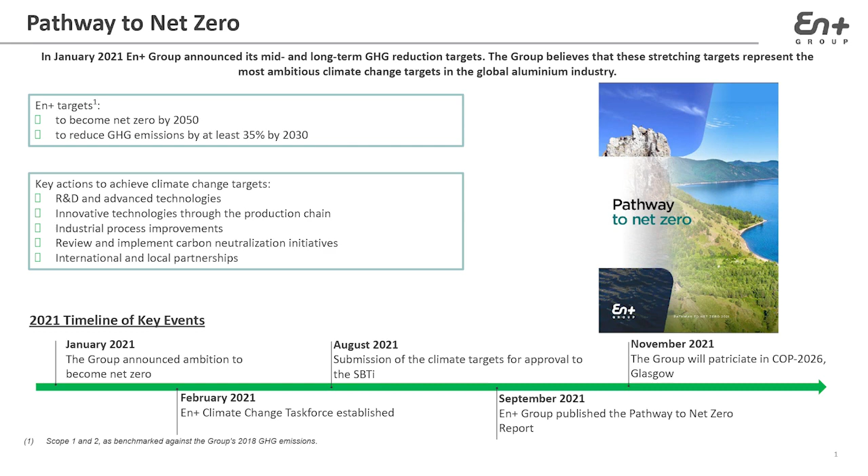Next was the success of our new generation of inert anode electrolyzers, allowing us to produce the lowest carbon aluminium ever created, tantalizingly close to net zero. We also said that in September 2021, we would publish a detailed plan for our pathway to net zero. Well, here it is. We have rigorously stress-tested these proposals, consulting with a wide range of global stakeholders, customers, and outside experts. But let's be honest, genuine decarbonisation isn't easy. It will be a real challenge, and implementation will only get harder. But that won't deter us.

Decarbonising power sources represents about 60% of the potential emissions savings in the aluminium industry. But we already have more than 98% of our aluminium made in smelters using clean, renewable hydropower. So we are not exactly replete with unpicked low-hanging fruit, and we've had to look hard at the entirety of our global production chain to get to a credible route to net zero.

Fortunately, a green business can also be an efficient business, and so we will squeeze out every efficiency to be made. But we also can't dodge the fact that transformation on the scale we are proposing will also require massive investment. Therefore, the group is embarking on an ambitious new cycle of investment with an unprecedented programme of capital expenditure. This will make us not just fit for the new sustainability standards of the 2020s, but ultra-competitive in a future world which can't afford to produce carbon at all.

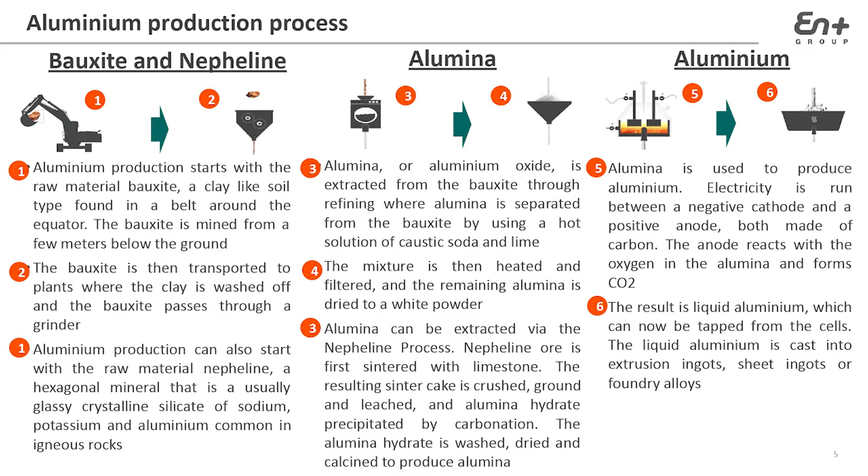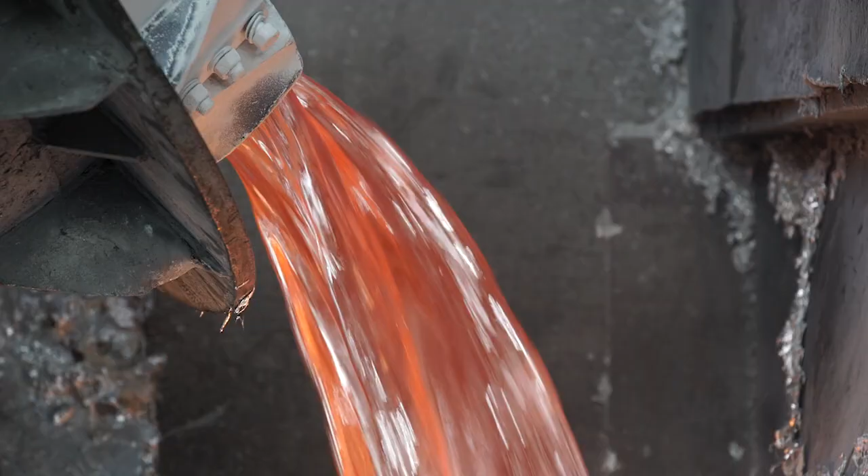Thus, by 2050, we will be a net zero producer in terms of greenhouse gas emissions. Our experts will walk you through various stages, but let me summarize. We're going to go through all production facilities under Scope 1 and Scope 2 in both metal and power segments. And we are going to concentrate on several measures.

First, which is our primary focus, is abatement. Second, there is avoidance of emissions. And third, there is compensation. Talking about abatement, from 2030, we'll start reducing our emissions at smelters by using so-called pre-baked anode technology. And aluminum refineries will be using natural gas and LNG where it's applicable.

From 2040, we'll be converting to inert anode technology. And aluminum refineries will be using either green hydrogen or electric power from renewable sources. Then, let's not forget that we'll be continuing to enjoy the benefits of low carbon hydropower. And this will be our avoidance program. We launched a new energy program, which is a very good example and a success story of this. Mikhail will talk more about this.

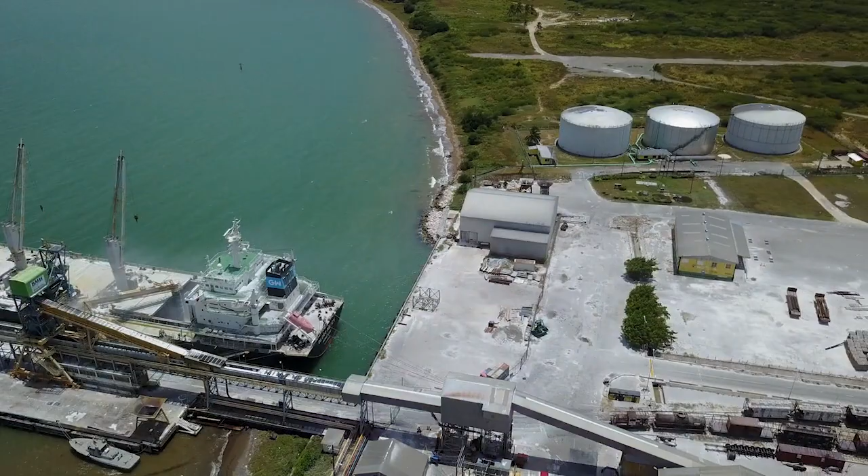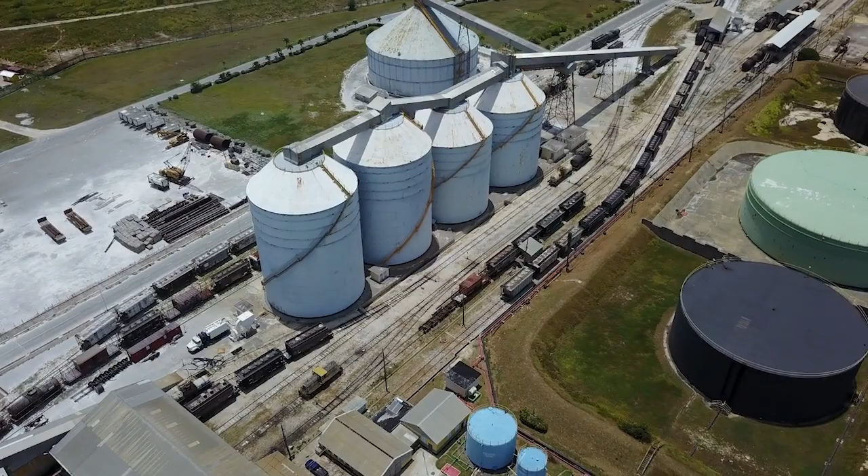We're looking at projects to both lower GHG footprint and reduce cost per ton for our operations. Windalco has also looked into measures to reduce the GHG footprint of its ancillary facilities. For example, lighting of the pier at Port Esquivel is now fully solar powered, and plans are currently in progress to have the entire port solar powered. At Ewarton, plans are in place to have areas of the plant solar powered where possible. In Jamaica, we look forward to contributing to the net zero ambitions.

Hello everyone, my name is Stefan Beaulieu and I'd like to welcome you to Rusal Aughinish Alumina Refinery based in the west of Ireland. It's a pleasure for us to give you an insight on our carbon journey so far, on what we've achieved and what we're planning to do to reduce carbon emissions towards zero. Protecting the environment and surrounding areas has been a priority since the refinery has been in operation. Some of the areas around the plant are European designated protected areas for various species and habitats.

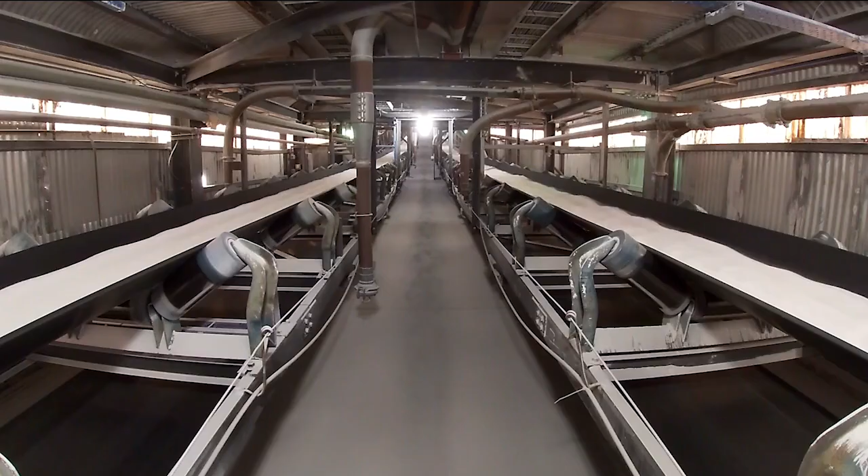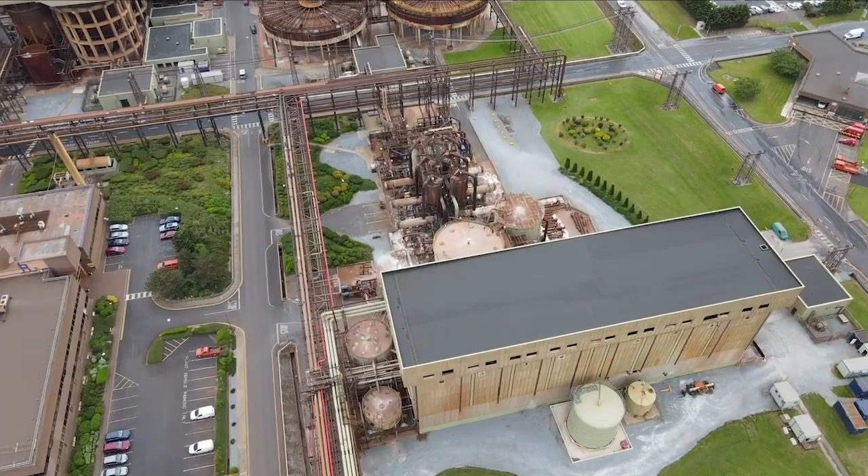The plant has been in operation since 1983 and today produces over 1.9 million tons per annum of alumina. The alumina is mostly shipped to Europe for the production of aluminium. Aughinish has a total of 650 workers on site, and the plant is one of the most energy efficient refineries in the world and currently the 4th lowest carbon emission producer per ton of alumina. This was achieved with a high level of commitment to continuously reduce the energy requirement to make alumina and a high level of investment to migrate from oil as energy source to 100% natural gas since 2014. Moving to renewable energy sources is the next phase of our journey.

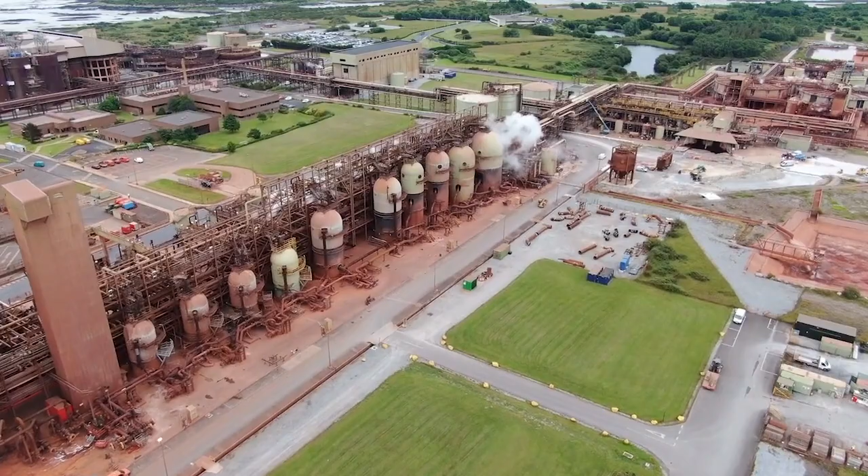Aughinish Alumina was designed in the 70s, and the only energy source available here in Ireland at the time was fuel oil. Temperatures of up to 250 degrees centigrade are required to dissolve the alumina contained in the bauxite via a process called Bayer digestion, and temperatures above 1000 degrees centigrade are required to calcine the product into alumina. These two processes are very energy intensive, and Aughinish has invested very significantly over the years to improve its energy performance and reduce its greenhouse gas emissions.

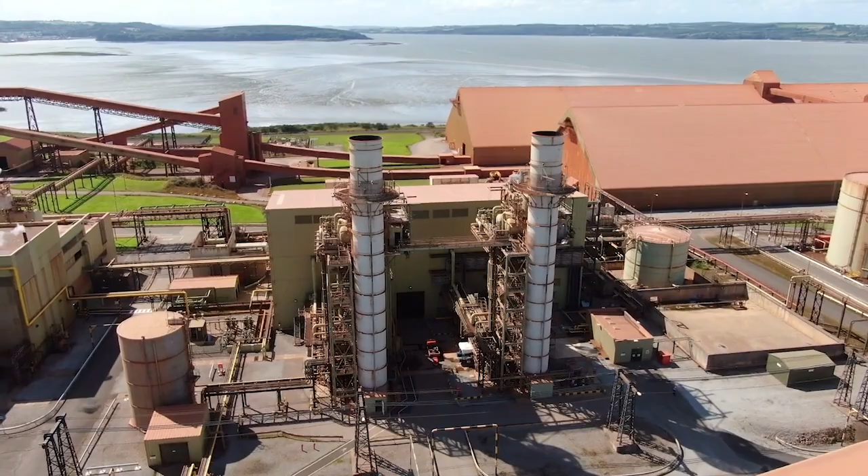The conversion from fuel oil to natural gas was delivered with a major multi-year investment program which was initiated in 2006. It started here with this big building behind me. A new 150 megawatt high efficiency combined heat and power plant, or as we call it, CHP. The CHP plant supplies 300 tons per hour of steam to the refinery and 40 megawatts of electricity is produced to supply the plant equipment, with the excess power exported to the national electricity supply network.

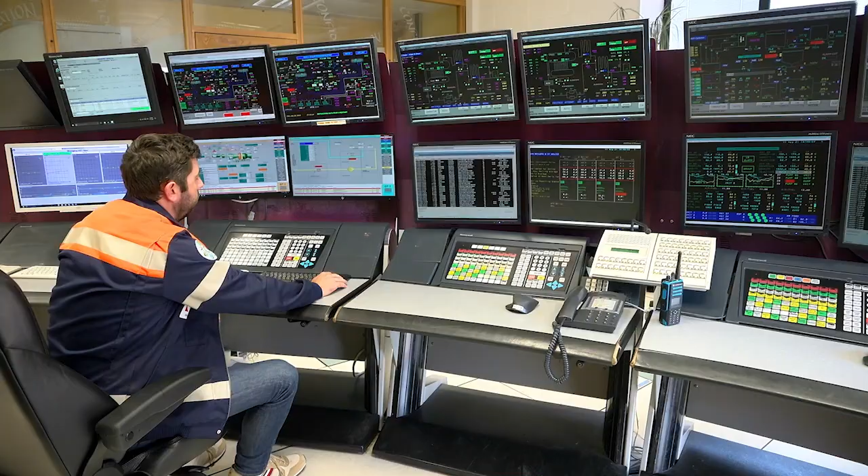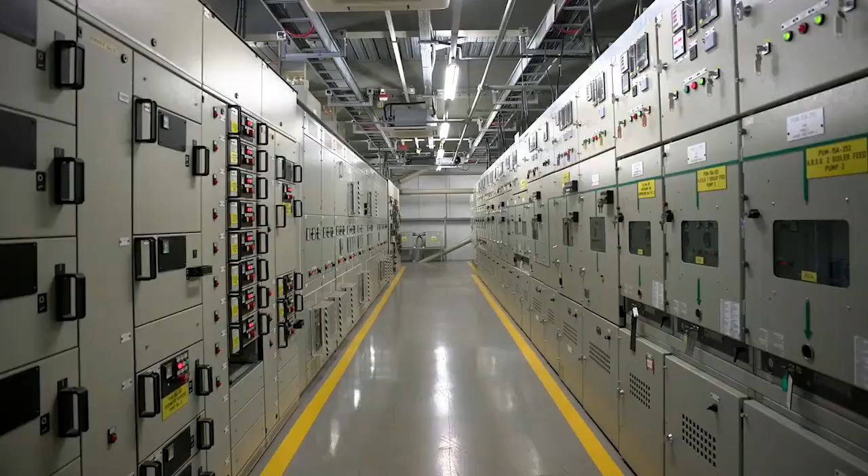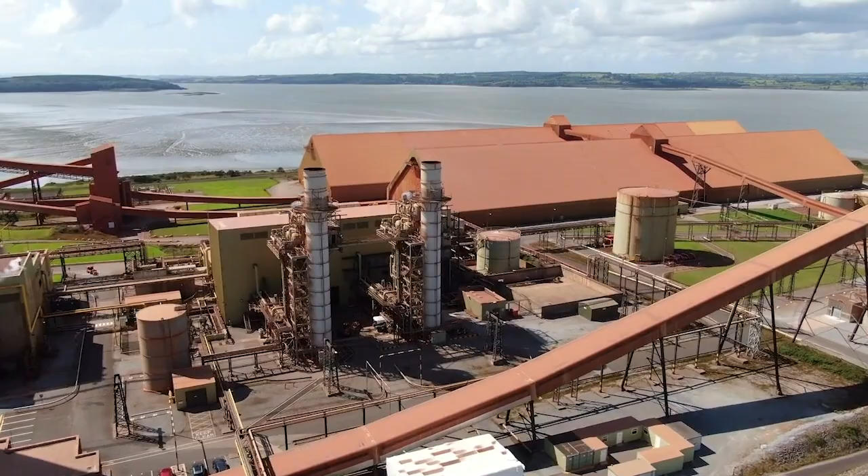The electricity produced by the CHP plant is much lower in carbon content compared to the national average. CHP is still the lowest carbon technology after wind to produce steam and power in Ireland. CHP will remain the best technology until a renewable fuel is commercially available and economically viable to industry in Ireland, which is probably more than a decade away.

On the calcination side, all 3 alumina calciners were fully converted to natural gas by 2012. And to complete the transition to natural gas, in 2014, 2 new gas boilers were constructed to replace the fuel oil boilers. In parallel to this fuel transition, many energy improvement initiatives were implemented in the refinery.

With these investments and continuous internal energy improvement, carbon emissions have reduced by 40% in the last 20 years. Sulfur oxide emissions have reduced by 100%, and nitrogen oxide emissions by 90%. The next phase of our journey will be exciting and challenging, as we need to make major carbon reduction using technologies that are currently not commercially available.

This will be done by improving process energy efficiencies such as recovering waste heat in all areas of the refinery and by moving towards using renewable energy sources. The wind is currently the most abundant renewable energy available, with over 300 wind farms in operation in the Republic of Ireland. Aughinish plans to start producing steam to supply the refinery using an electric boiler.

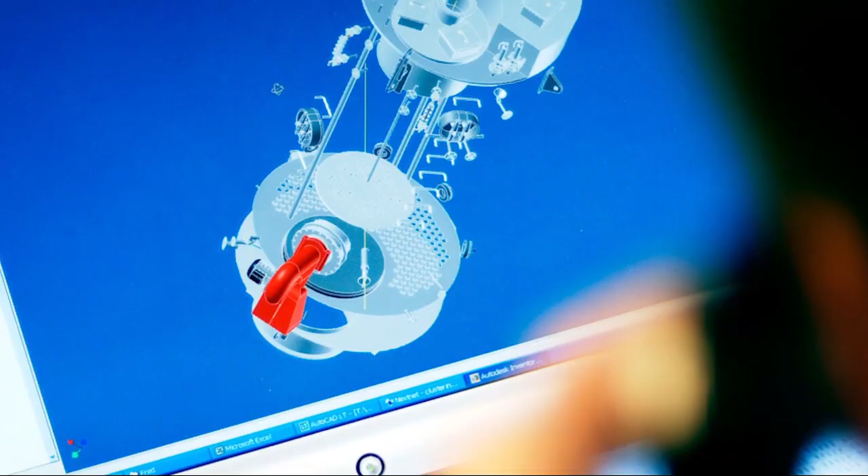We have been successful in a project grant application to install a 25 megawatt high pressure electric boiler. This boiler technology can ramp up and down very quickly depending on variation of wind power generation. The project will improve grid stability as well as providing steam to the refinery from renewable electricity in periods of wind generation.

Electrification of our processes will play a significant role in our decarbonization roadmap, and it is possible for us in Ireland that green hydrogen and biofuels may become economically viable in the coming decades or so. In summary, Aughinish is very well positioned to face the transition towards a zero carbon production of alumina.

An important part of our pathway plan is our continued commitment to our new energy program, which has been ongoing since 2007. The new energy program provides for large-scale reconstruction, replacement, and modernization of the main equipment at the company's Siberian hydropower plants: Krasnoyarsk, Irkutsk, Bratsk, and Ust-Ilimsk.

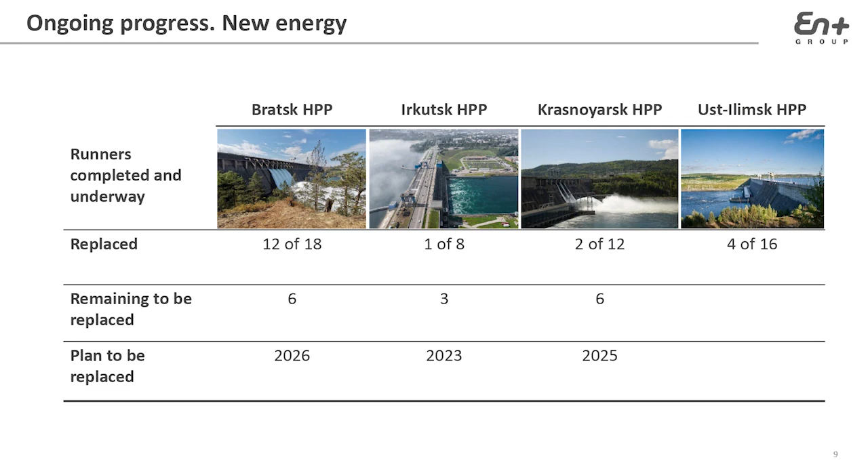Hydroelectric units are being retrofitted, and the turbine wheels, transformers, and outdoor switchgears are in the process of replacement. The modernized turbines also incorporate an up-to-date runner design that prevents risks of turbine oil leakage into water. As a result, we can ramp up the energy output from the same volume of water passing through the hydropower turbines.

Upgraded equipment at our HPPs has already supported an increase in hydropower production of 1.7 terawatt-hours in 2020 and helped to prevent greenhouse gas emissions by approximately 2 million tons due to the partial replacement of prior thermal power generation volumes. We are on track to generate 2.5 terawatt-hours more electricity by 2025.

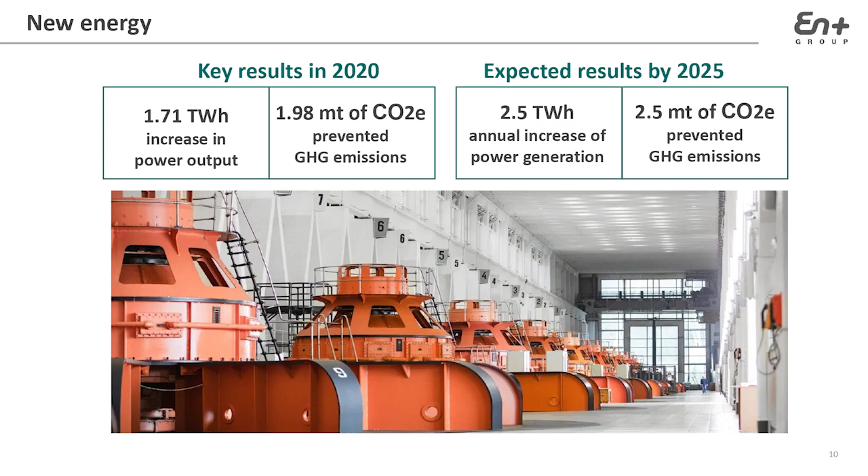The program will also allow us to prevent emissions of at least 2.5 million tons of CO2 from 2025 by replacing coal-fired power generation volumes with hydropower-generated electricity. Additional higher efficiency of up to 8% will result from the improved blade profile of new turbine wheels and the materials used. The modernized HPPs will become even safer and more reliable.

We will also work to decrease losses during transmission of electricity. That means reducing losses to less than 5% of electricity supplied to the high voltage and low voltage grids by 2024. To ensure further transparency of aluminum carbon footprint, we decided to measure anthropogenic GHG emissions from HPP reservoirs, in line with the IPCC guidelines for national greenhouse gas inventories.

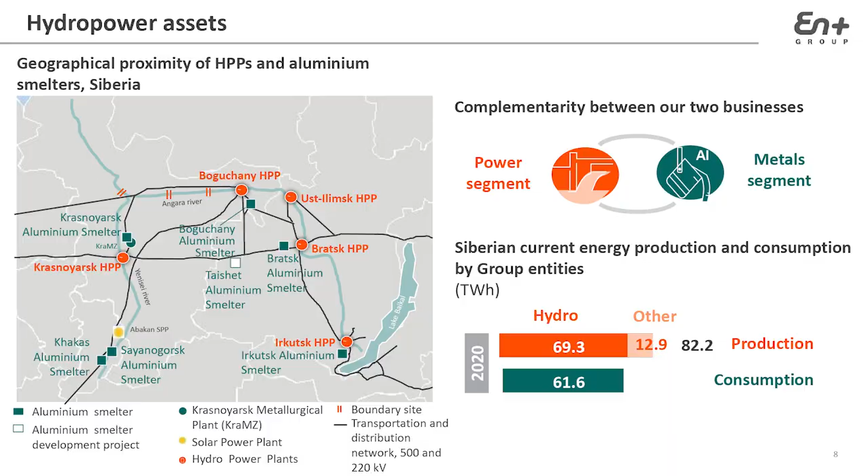The aim is to define and calculate Tier 3 emission coefficients for 6 HPP reservoirs in Russia that either fully or partially belong to the group: Irkutsk, Bratsk, Ust-Ilimsk, Krasnoyarsk, Onda, and Boguchany. As a part of our strategy, we will continue to conduct R&D on smart grids and solar energy, as well as construction of small HPPs.

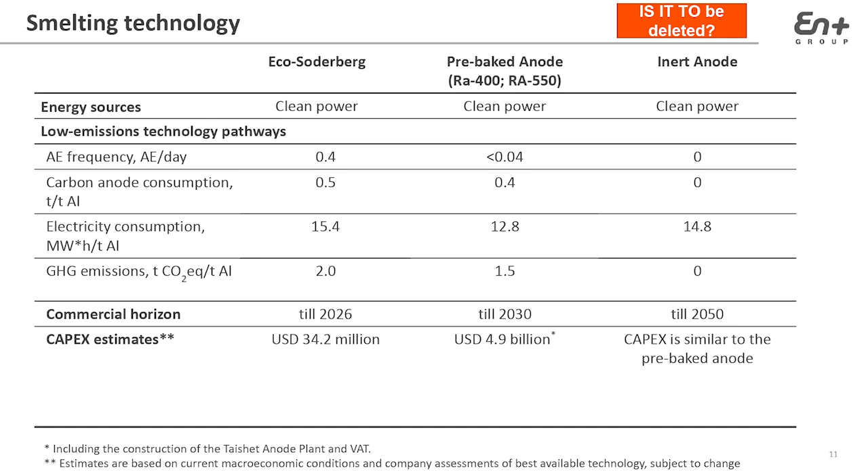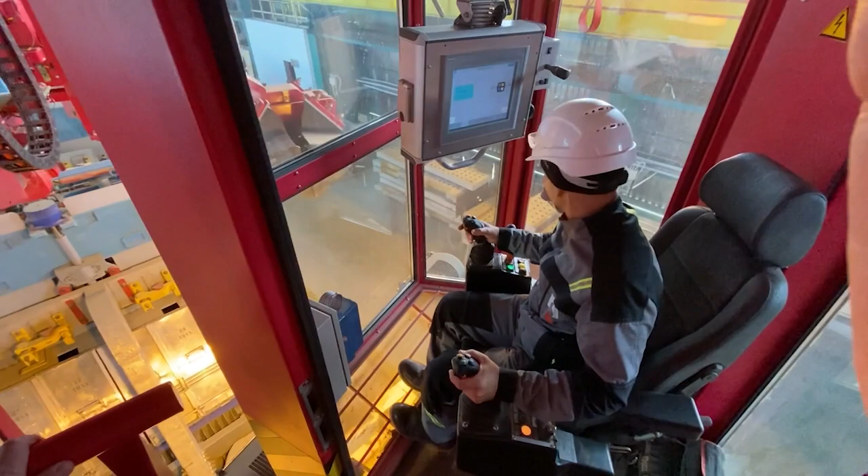I am Nikitin Evgeny Viktorovich, Chief Officer of Rusal Company. Converting half of the capacity at Krasnoyarsk, Bratsk, Irkutsk and Novokuznetsk smelters to pre-baked anode technology is planned for a period between 2025 and 2030. Once implemented, the program will also help massively reduce the smelter's emissions of fluorides and resinous substances, including benzopyrene. This will also reduce energy consumption by 11 to 18%.

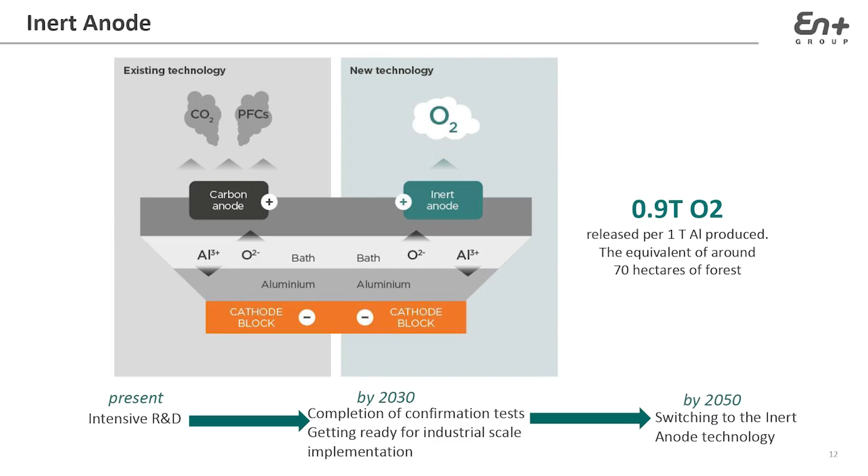And of course, there is inert anode, our innovative technology. Here, the smelting process uses anodes that do not degrade during production, meaning oxygen is created as a byproduct rather than carbon dioxide and perfluorocarbons. Even as early as this year, many of our industry peers and partners considered low-carbon aluminium as some sort of gimmick.

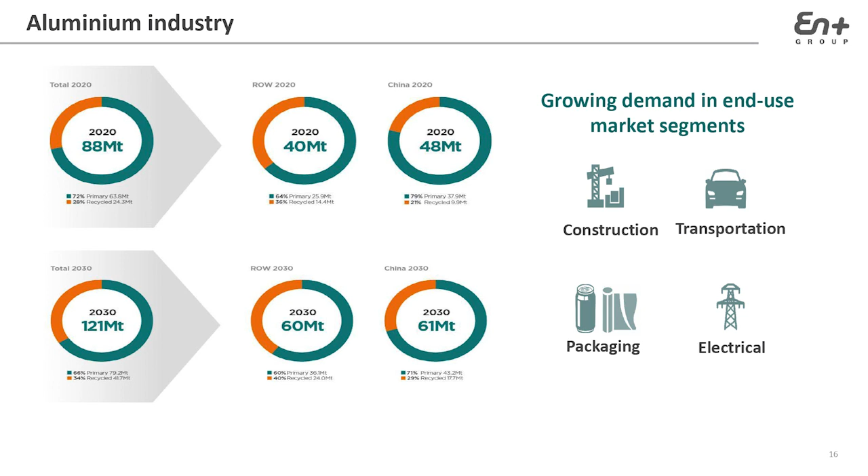The fact is that demand for low-carbon aluminium is growing across multiple key segments. This is only going to continue to grow in the years and decades ahead, driven by energy efficiency via lightweighting, as well as decarbonisation of products during their life cycle. That is because this versatile metal has a critical role to play in building the circular economy of the future, thanks to its unique properties and its infinite recyclability.

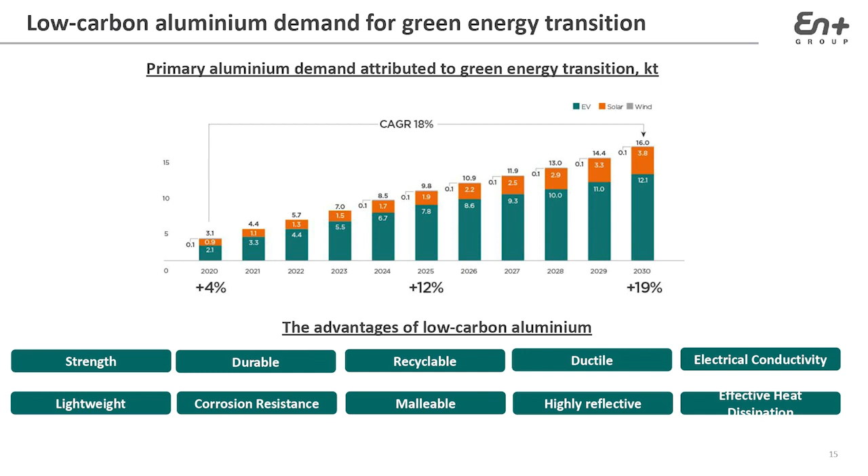Demand for aluminium is anticipated to grow by more than 50% by 2050, and the industry is constantly looking at pathways to reduce its carbon footprint, and we are leading the change in this process. Considering LCA, we estimate the current demand is 3.5 million tonnes per annum, and we anticipate this to grow tenfold to over 30 million tonnes by 2050.

Whilst we are blessed with over 90% of our production coming from renewables, we aren't resting on our laurels. Thanks to the revolutionary new inert anode technology that Rusal is pioneering, we are making it possible to eliminate greenhouse gas emissions from the process altogether.

When combined with renewable hydropower, inert anode technology provides an unprecedented low carbon footprint in metal production. And this is not hypothetical. Rusal has already successfully produced aluminium through the program with the industry's lowest carbon footprint, less than 0.01 tonnes of CO2 equivalent per tonne of metal.

As a first mover in this groundbreaking technology, we have partnered with Ball Corporation to produce aerosols and other containers made from the world's lowest carbon aluminium. This truly represents the future possibility of sustainable aluminium products that go beyond our current low carbon capabilities by eliminating all greenhouse gas emissions during the production. Total decarbonisation of our industry has to be the goal, and we are showing the way forward.

As a company, we are not yet 25 years old, and yet we produce about 6% of the world's aluminium, and we are the largest producer of low carbon aluminium globally. We already meet more than 90% of our energy needs through hydropower, and we're amongst the first aluminium producers to be rated A by the Carbon Disclosure Project.

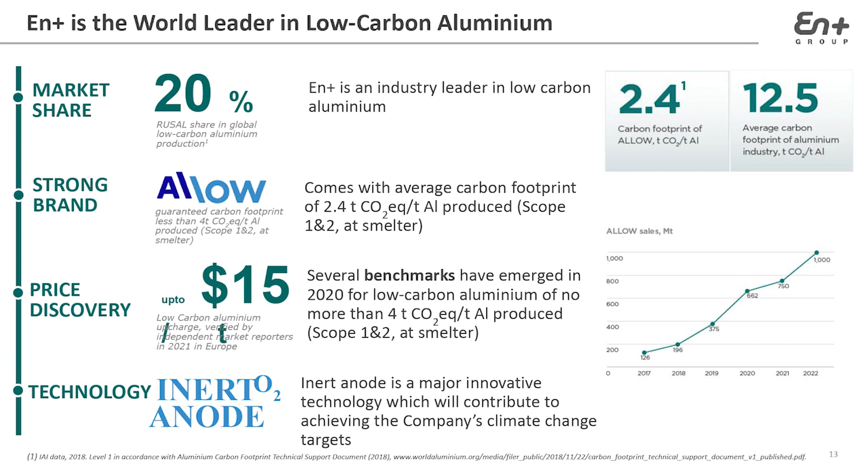We signed the first ever sustainability-linked syndicated facility arranged by international and Russian lenders, representing a sum of over $1 billion US. And we're not afraid to stand out from the crowd. The launch of our Allow brand in 2017 and related market developments of the low carbon segment illustrate our drive and initiative to do what is right for our industry.

Rusal represents a force for change, whether it's engaging at the highest levels of government or advising the London Metal Exchange on its own sustainability initiatives with the launch of the LME Passport, or active membership of industry associations such as the IAI, the Aluminium Association of America, or the Japan Climate Leaders Partnership. You will find us there, leading the industry forward.

Based on the results of pilot projects, we will consider green hydrogen as one of the ways of substitution for fossil fuel along the whole value chain. It is expected that green hydrogen will become cheaper and more readily available in order to support, for instance, alumina hydrate calcination in alumina refineries or heat and steam production necessary for the alumina production process. We anticipate that the main source of greenhouse gas emissions from alumina refineries will be eliminated by 2050.

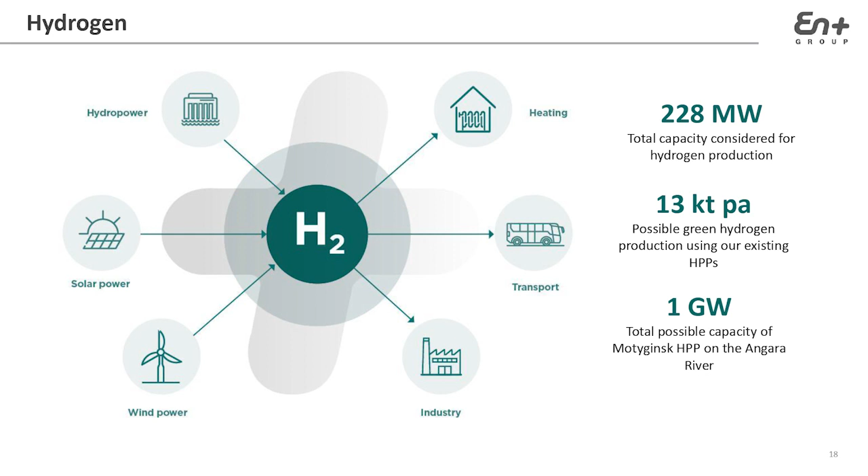Global demand for clean hydrogen by 2050 is estimated to range from 539 million tons to 813 million tons, a tenfold increase compared with current levels. Hydropower is the most mature, reliable and one of the most cost-effective renewable power generation technologies available today. In terms of the availability of hydropower resources, Russia ranks second after China in the world, ahead of Brazil, Canada, India and the United States. However, use of hydro potential in Russia is significantly lower than in other countries.

So, less than 20% of the hydro potential of Siberia and the Far East is currently channeled for energy production purposes. Untapped hydropower resources allow the development of green hydrogen production, and thus En+ Group is examining opportunities for large-scale green hydrogen production using electricity both from existing HPPs and captive new-built renewable projects, hydro and wind, both in Siberia and in the Far East.

For example, we are exploring the construction of a 1 gigawatt Motyginsk HPP on the Angara River, solely for hydrogen production. And thanks to the new energy program, we are able to explore green hydrogen production of up to 13 kilotons per year using the additional electricity output from our existing hydropower plants. Extra capacities are now available at Irkutsk, Bratsk and Ust-Ilimsk HPPs. The company also considers using electricity generated by the Ondskaya HPP in Karelia to produce green hydrogen.

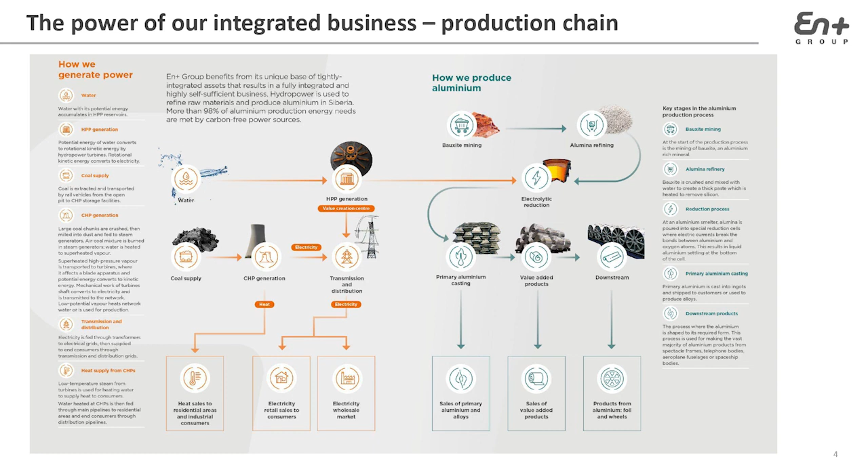EN+ Group and Rusal are the only two Russian members of the Carbon Pricing Leadership Coalition, and in 2021, Lord Barker became one of the two CPLC high-level assembly co-chairs. We support the Paris Agreement and endorse and align our activities with the global climate change goals outlined in the United Nations Framework Convention on Climate Change. We are actively involved in the United Nations Global Compact and the World Business Council on Sustainable Development, through which we advocate for decarbonization of our sector. In August of 2019, EN+ Group joined the Science Based Targets Initiative and Business Ambition for 1.5 degrees. We are also active in the drive towards the energy transition.

Thank you for staying with us as we've navigated our way through this important report. But I genuinely believe our pathway to net zero is actually an inspiring read. It's become increasingly clear that getting greener is also making us more efficient, more competitive. There is indeed a compelling business and economic case for us as a group to lead the low carbon transition. This in turn opens the way for innovative, low carbon products to become lower cost and more competitively priced for every global consumer, so more people can buy them. And as businesses, we must all play our part in the fight against climate change and accelerate towards a low-carbon economy. But governments can also do more.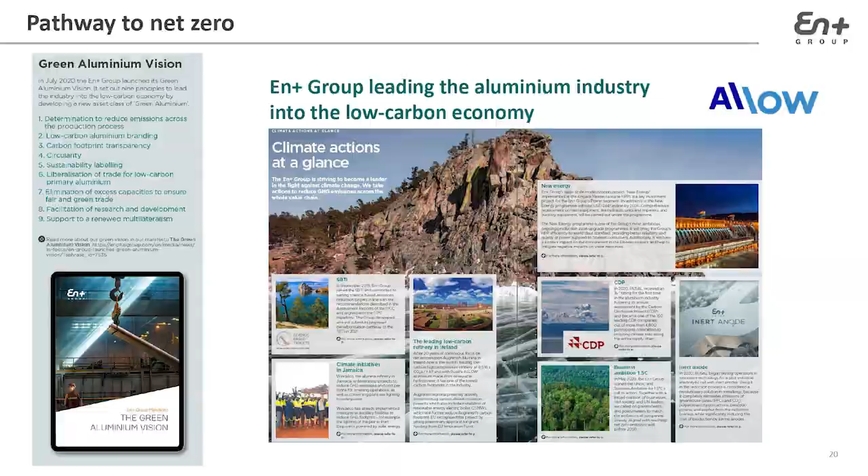In particular, we need policymakers to embrace green free trade. We need the permanent suspension of import tariffs on all products with a low-carbon content, especially a material as essential as low-carbon aluminium. Green free trade is an easy shortcut to a low-carbon future. Sustainable businesses the world over need access to our vital green metal. Aluminium is incredibly strong, lightweight, non-corroding, and endlessly recyclable. Aluminium plays a vital role in the green energy transition. We simply can't build a low-carbon economy without low-carbon aluminium. So now more than ever, it is the material of the future. And if we follow this plan outlined today, we can get there.